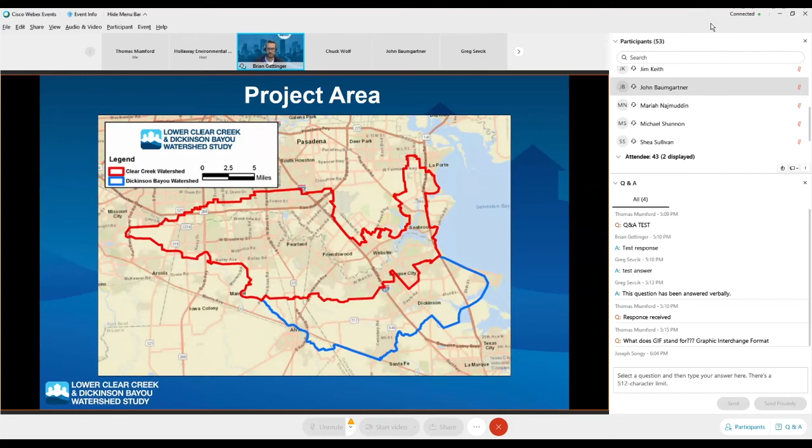So some more about the focus, just to set the table. I mentioned, and we're going to hear this a few times, this is a riverine study of regional magnitude. So depending on the kind of study you're doing, depending on the scale you're looking at, you use different modeling software. This project was based on modeling software that's focused on riverine analysis, that's looking at very large flows following a large channel.

And so we are predicting things that are going to have impacts on the channel. There may be impacts that are happening away from the channel that are affected by the channel but not directly associated with it. So when we talk about damages and flooding, you might say, hey, my house or business flooded during Harvey, and your map's not showing that. Why is that happening? That's because this is just a riverine analysis. And one of the next steps we'll talk about towards the end is potentially tying the localized storm drain capacity constraints into the analysis to fully predict what those things look like.

We are looking at a 24-hour duration storm event with an Atlas 14 intensity. So the Atlas 14 is something that came from NOAA. That is the most recent rainfall data that is different than what the floodplain maps are currently based on. Even the newly adopted floodplain maps are not based on that rainfall intensity. So we're using the newest and best available data.

The benefits that we're going to talk about tonight, as far as number of instances of flooding that are reduced and the damage reduced, are also going to be higher than what is presented in this study. So we have a table with the damages caused by the flooding and reduced, but because we're not tying in the local storm sewers, there's a very high likelihood that those damages are going to be prevented to an even greater extent because of those storm sewer impacts.

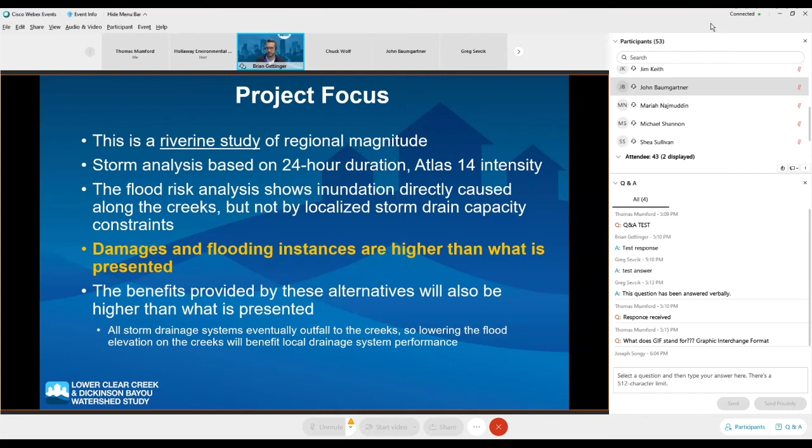So where are we? Again, we're in Dickinson Bayou. The analysis is focused on essentially a subset of the Dickinson Bayou watershed because we're looking at the riverine impacts, so the area in close proximity to the channel. We divided the watershed into 3 different reaches. The purpose of that was to support identifying and evaluating improvements in different sections of the watershed because the watershed is going to behave a little bit differently in different sections.

So when we talk about damages and instances of flooding and impacts, you'll see things presented in reaches, Reach 1, Reach 2, and Reach 3. So think about those happening from west to east as we go across tonight.

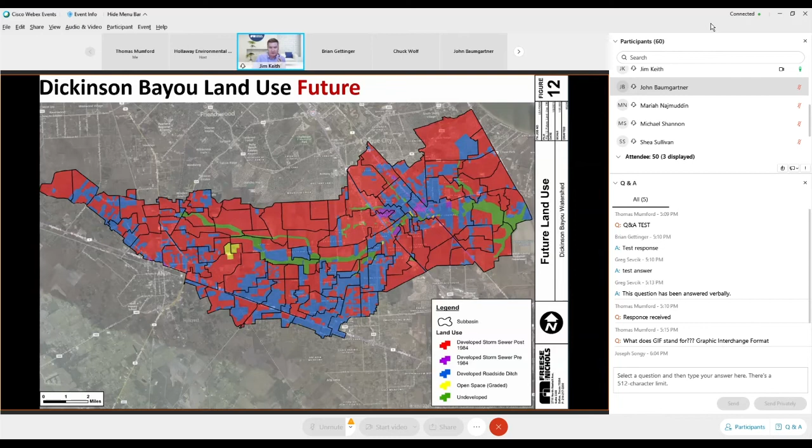The comparison here shows the FEMA effective discharges, as well as our new existing conditions, which is based on the Atlas 14 rainfall. So you see some increase already there in terms of what FEMA had previously modeled and our new model based on the rainfall data. And then the future discharges, which again do not assume detention, but you're looking at 6 to 7% increase in discharges between just existing and future conditions.

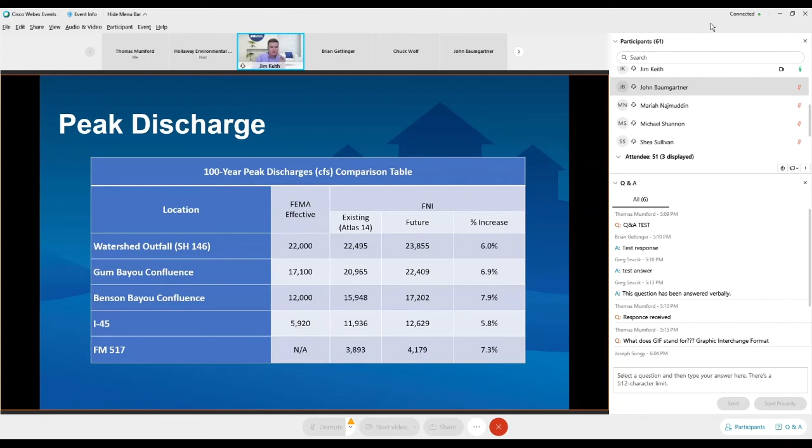So how do we convert that flood risk, those numbers, into damages, which really helps us understand the challenge that we have to solve here. And so what we did is bookend the problem between a 500-year storm, which we all know you guys have suffered major storm events in this region. And so we know we need some solutions to reduce flood risk during those types of events. And then we look down to a 5-year storm, which is a pretty frequent event. But you can see in the Dickinson Bayou watershed, there's still a significant number of structures. Over 1,300 structures are flooded in a 5-year storm.

And so this window here is what we're calling our area of benefit. Structures that are flooded in a 5-year or below storm events are really unlikely to benefit from any kind of structural improvements that we're proposing. They're too low in the floodplain to really see any kind of impact. And so those types of structures are typically good candidates for elevation or buyouts, what we call non-structural improvements. So we're focusing our area of benefit and our solutions on this zone of damages that can be mitigated between the 5-year and the 500-year storm. And you can see that's $765 million worth of damage and over 13,000 structures.

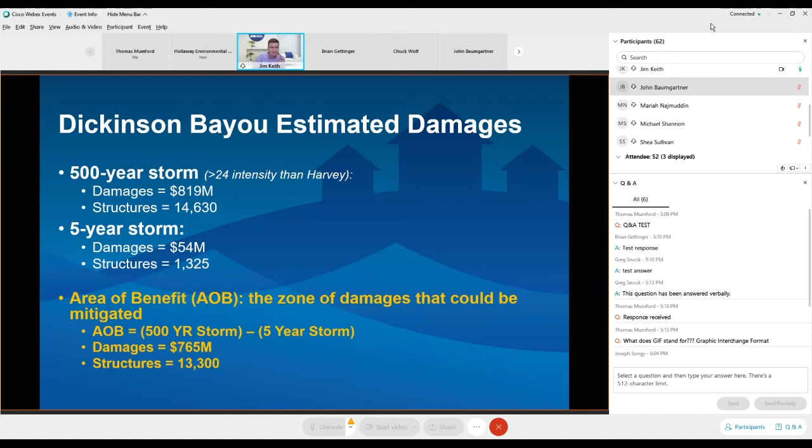You've seen the view of the flooding from above in some of the previous figures, looking down on the floodplain. This image is a little different. What we're looking at here is a profile of Dickinson Bayou, looking at it from the side. On the left, you'll see the green line is State Highway 146. And as you move to the right, we're working our way upstream. Just imagine you're going up the main channel of Dickinson Bayou, past I-45 up to Cemetery Road.

The red line is the 5-year flood elevation. The blue is the 100-year. And the purple line is the 500-year flood elevation. And all of these tiny X's that you see across here are structures based on the estimated finished floor elevation. So we found this graph to be really informative and a really good way for us to look at the flood risk through this watershed.

You can see that there are a significant number of structures, especially between State Highway 3 and I-45. There it is. There's the bowl. There's just a low, depressed area here. And so it helps us understand not only the extensive flooding, but really the depth of flooding that can impact these structures. And the damage estimates are really driven on that depth. The Corps of Engineers provided depth damage curves that we used. And so obviously as the depth of water in a structure increases, that damage increases greatly.

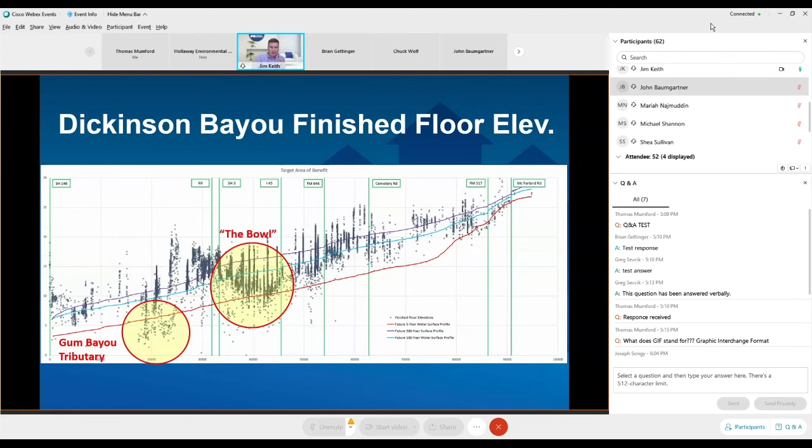So these two circles here show, again, in side profile view, the two areas we're really focused on reducing flood risk in this study. That's the bowl and then that Gum Bayou tributary.

So this became a really challenging area as we started to look at these mitigation solutions. Brian's going to talk about that in a little bit, but getting water out of this bowl is a major challenge.

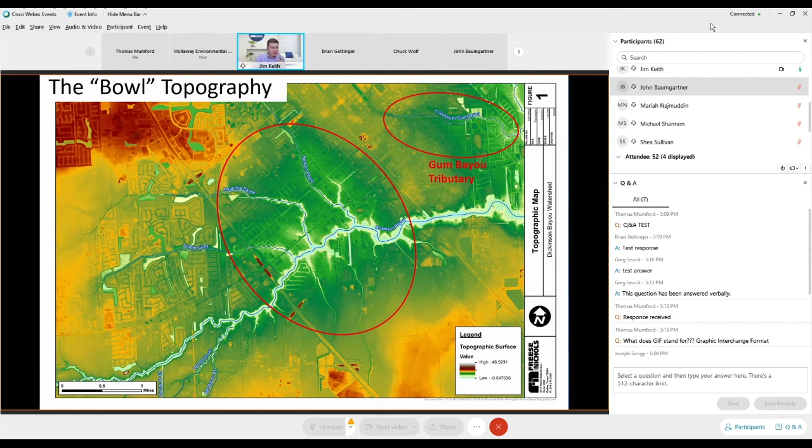So the results of the flood risk assessment, again, we broke the planning area into these three reaches. You see here DB1, DB2, DB3. And so we looked at the number of structures flooded on individual events, so just for the 500-year or the 100-year event. But what's really informative for us is to look at the instances of flooding over an entire 50-year period.

And so this is a statistical projection. If you look at over a 50-year period, you're going to get 2-year storms, 5-year storms, 10-year storms, you're going to get a 500-year storm. If you look at that 50-year window, you can see the instances of flooding stack up. And so the results show that we'll have over 43,000 instances of flooding over that 50-year period with a damage of $483 million. And really more than $483 million if you factor in all the reaches.

So the damages and flooding instances increase in the future. And part of that is due to sea level rise as well as future development. So another area that the Corps of Engineers helped us with is sea level rise projections. And those projections were incorporated into the downstream boundary conditions of the model.

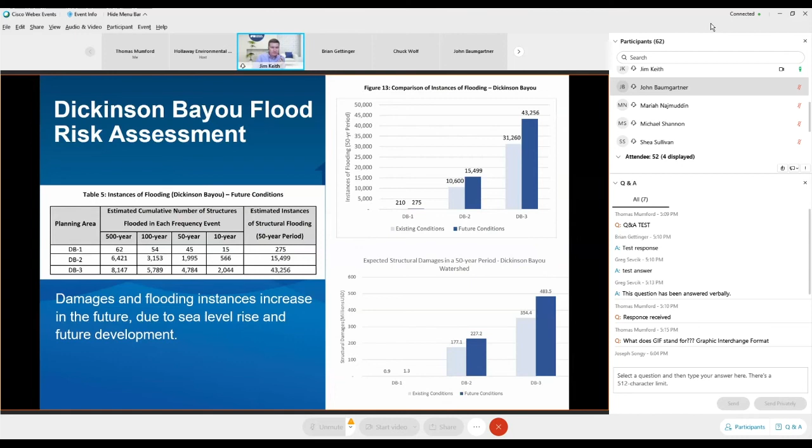So beyond just the number of structures and damages, we looked at transportation system impacts. Transportation obviously affects us during a storm event. It affects you getting around town, being able to pick up your kids, for emergency responders to get to people that need help. And so we used an established flood hazard calculation that's done by the U.S. Bureau of Reclamation that looks at the depth of flooding over roadways and then how fast that water is moving over the roadways to provide a hazard classification between a low danger zone, a judgment zone, and a high danger zone.

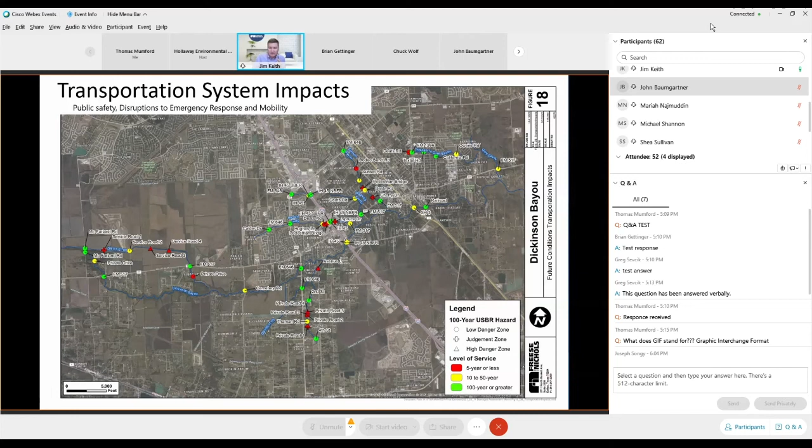And so these dots on the map, basically green circles are areas of lower flood risk, and red triangles are areas of the highest flood risk. I think the good news here is that most of those red triangles are small rural roads. But again, you can see some major thoroughfares are impacted in some of these events.

And then we also looked at critical infrastructure. So this is fire stations, medical facilities, hospitals, schools, and major water infrastructure, treatment plants, pumping plants. And this is also an important factor as we look at where we can reduce flood risk. We need to make sure that in major storm events, these critical infrastructure locations are able to function or protect people. So the blue area shown here is the 100-year storm event. And so you can see along FM 517, there's several schools that are at risk, as well as some water infrastructure and some hospitals there to the north.

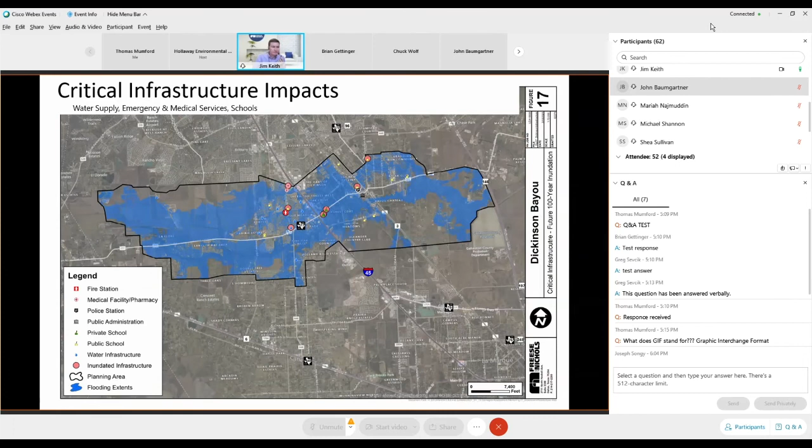So to summarize the flood risk segment here, the flood risk in Dickinson Bayou is significant, and particularly in Reach 3. You can see we have, in the 500-year event, well over 14,000 structures that can be flooded just in that single event. That's not even over the 50-year period. That's just in a single event. And $1.7 billion of flood damage for a 500-year event.

And so we used these damage estimates and looked at this curve to see, okay, where can we get our best bang for our buck? What kind of projects can we implement that can reduce not only the large 100-year and 500-year events, but this 10-year event as well, where we still see significant flooding in the watershed. So with that, I'm going to hand it back to Brian to start walking through the mitigation alternatives.

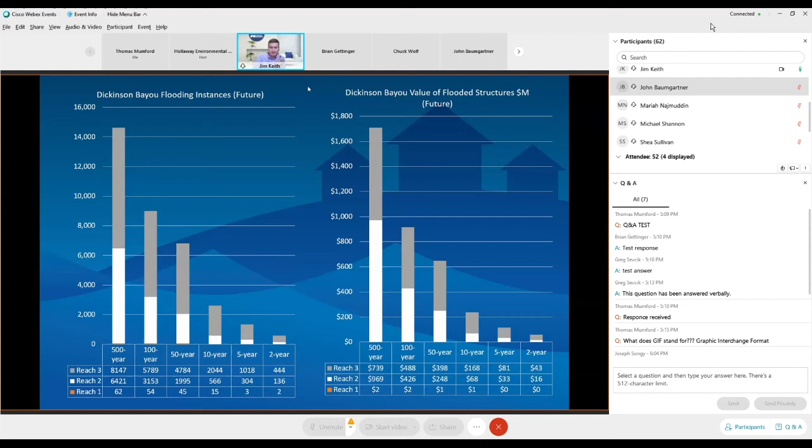Thanks, Jim. Appreciate you walking us through that. Before we jump off the slide, one thing that attendees might find interesting is, where are the orange bars, right? I see Reach 1 with an orange dot. Why is nothing happening in Reach 1? At this point in Reach 1, there are very few structures to flood. It's not that flooding is not happening in Reach 1, it's just not flooding very many structures.

So it is important that as new structures are built in Reach 1, that they are built at an elevation that they will not flood, right? Setting those elevations based on known flood maps is really important, and making sure that their neighborhoods or structures don't flood is critical, because right now, the only reason things aren't flooding in Reach 1 is because nothing's built there yet. Otherwise, it would look similar to the other two reaches.

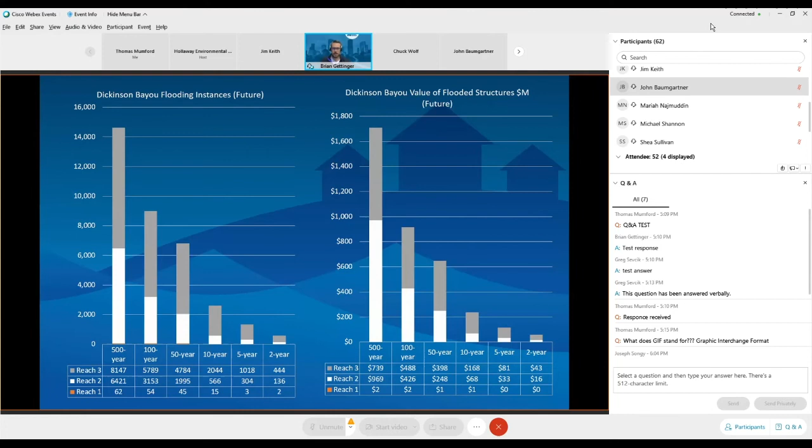All right. So we've established the flood risk, which is significant. So let's talk now about how do we mitigate it? What are the mitigation alternatives? So before we jump into those alternatives, we need to talk about how we're going to evaluate them. So we have 4 different quantitative metrics, and Jim walked through these on the damage basis, but we're going to now evaluate these on how much they benefit those damages.

So instances of flooding, how many times a structure is inundated during the 50-year project horizon period, which is a statistical analysis that accommodates the 2, 5, 10, 50, 100, and 500-year storm events, and looks at how likely they are to occur in a 50-year period. Structural damage, same thing. It looks at the value of the structure, uses an Army Corps guideline for depth of flooding to determine how much damage that structure incurs in that event.

Then we'll talk about capital cost. How much is this going to cost to build? And then transportation system impacts. How much better does the transportation system function with the improvements over the existing conditions?

And another thing to note, we talk about instances of flooding. I mentioned that this is all structures that exist today, right? Not future structures. Same with structural damage. We're looking at current property values, current structure values on those sites, as well as current elevation. So if structures in the future were raised, that would obviously take them out of the floodplain as well.

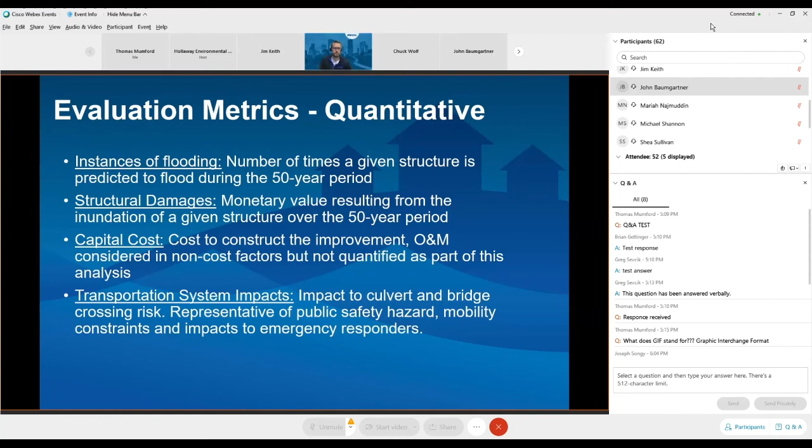All right, on a qualitative basis, we worked with the stakeholder groups to establish what we're calling non-cost factors. Everyone, I think, can appreciate that just the cost of a project and how many structures it benefits or doesn't benefit is not the only metric. Obviously, how it looks and feels, how much it disrupts the community is all very important information. How resilient is it? Is it going to work for 50 years without a lot of maintenance?

How many people do we have to get on board to do this? Is it kind of how we comply with other agency coordination? And how fast can we implement this? Is this a 10 or 15 or 20-year permitting project, or something we could start today? That also kind of ties into how expensive is it? Is it something we can finance quickly, or have to spend a lot of money over time to build?

So we looked at those factors. We weighted them with the stakeholder groups. They all weighed out similarly. The kind of four leading categories there, and then other agency coordination comes in at 10%. So all of the criteria were applied to all the different projects, and that's what we'll be presenting today. And when we produce the written report, we'll have a lot more detail backing up how each of those scored.

We also established a couple different constraints in order to help put boundary conditions on the analysis. For Dickinson Bayou, there were 2 constraints. The first constraint is that we are not going to cross I-45 with any sort of open cut solution. That would look like some sort of channel or a major culvert. We're not going to cross I-45. That is a major disruptor for the community.

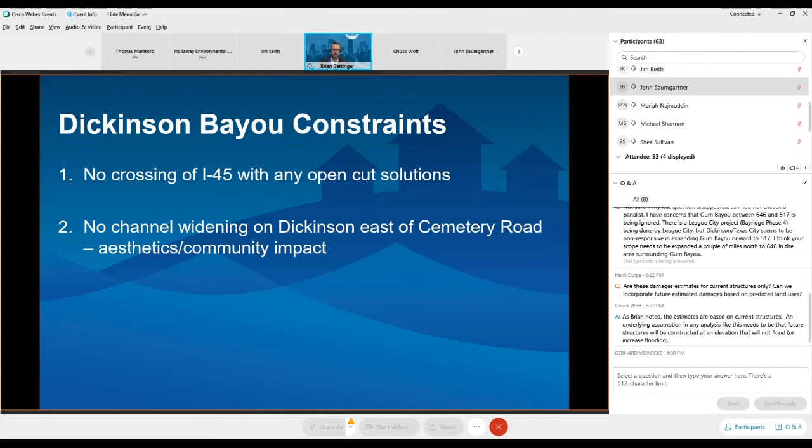Having been on Dickinson Bayou in a boat, it is a fantastic waterway. It has a lot of aesthetic benefits, a lot of community benefits. With a widening project there, there are also a lot of homes that back up to the bayou. We did not want to disrupt that as part of this analysis, so we're looking for solutions that did not widen or modify the bayou east of Cemetery Road. So with those constraints in mind, this is a list of all the different individual concepts that we evaluated.

So a lot of different detention alternatives, some bypass alternatives. We looked at clearing and desnagging of the channel, which is essentially removing vegetation along the channel banks. We suggest, in some cases, property buyout or elevation for properties that, as Jim mentioned, are so far in the floodplain that they cannot be realistically improved by other structural measures. And then we will spend a couple minutes talking about a flood wall, which is an interesting concept.

No bridge modifications were deemed to be a problem. We looked at all the bridges, and we looked at how they reacted during different flow events, and none of the bridges had major impacts for passing water based on current conditions. So that's a good thing.

And we did not have a tunnel alternative for Dickinson Bayou. Dickinson, because of its current state of development, is a good candidate for detention, particularly west of I-45, and in some cases a good candidate for a bypass because of the lower density development. Tunnels are generally useful more so when we have high density development. So tunnels were not going to be cost effective in this measure. We could move and store water more effectively in other metrics.

So those are different individual concepts we evaluated. We're not going to walk through each one of those and their benefits tonight in this meeting. We will walk through each of those in detail in the report that will be published. But tonight we want to focus on how these concepts play together to create a combination solution that has the most value.

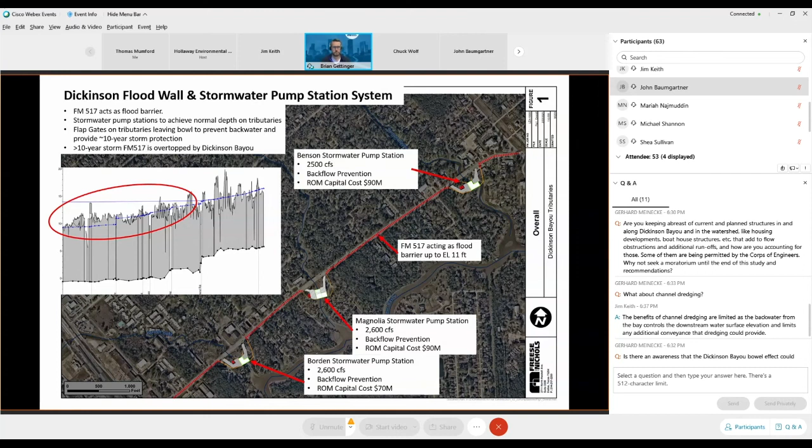How many flooding instances are reduced per dollar? Do these things cause downstream impacts that have to be mitigated? How many $1 million of flood damage reduction happens? And what's the capital cost, right? And then we have those non-cost factors. So detention ponds, particularly on open land or land that potentially could be purchased for sale, score pretty well.

Solutions that require a lot of land acquisition, like the bypass channels, score poor because of that. Now, this is only a 100-year event analysis. So if you're looking at a benefit cost analysis, you're looking at the whole suite of storms for the 50 years. So when we see this flood damage capital cost of 0.5, that's not a 0.5 BCA necessarily. That's just how it performed in the 100-year event.

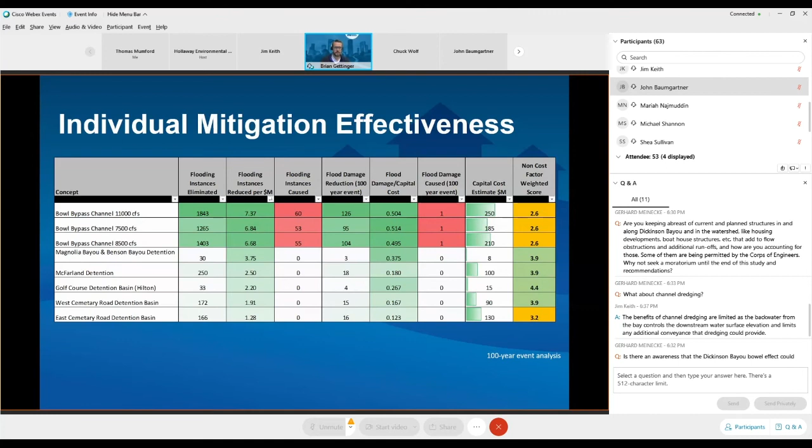So what we have now is kind of multiple different options, right? A suite of solutions. The question is, how do we utilize that suite of solutions in combination to benefit the area to the maximum level? So some conclusions that we came up with in the analysis.

Individual detention improvements provide localized benefits, which is good, but as we found out during Hurricane Harvey, detention ponds have a limited value when you get into a multi-day storm event because they fill up, they take a long time to drain. I know the detention pond near my house filled up, and it takes about a week to drain usually, right? So if we have a storm event that happens back to back or even over a couple days, that detention pond can't handle a multi-day storm event. So detention is good, but not as good as conveyance.

Although the water surface is reduced by multiple feet with the bypass channels, even with that large diversion, we're getting flooding still happening in the bowl, right? That's when we talked about the flood wall. The other thing that's important, because Dickinson has available land, we've got that regional detention opportunity on Dickinson Bayou that we don't have in our own study area, talking about Clear Creek, that doesn't exist anymore. So we need to identify areas for regional detention and plan those and get those lands set aside and built before development occurs.

The bowl is likely to need extensive elevation of structures, buyouts, or a flood wall, or some sort of stormwater pump station system. That area is extremely challenged. There were a lot of structures that were built very low in that area that today we would not build there, and we have to find a way to protect them or move them or raise them up.

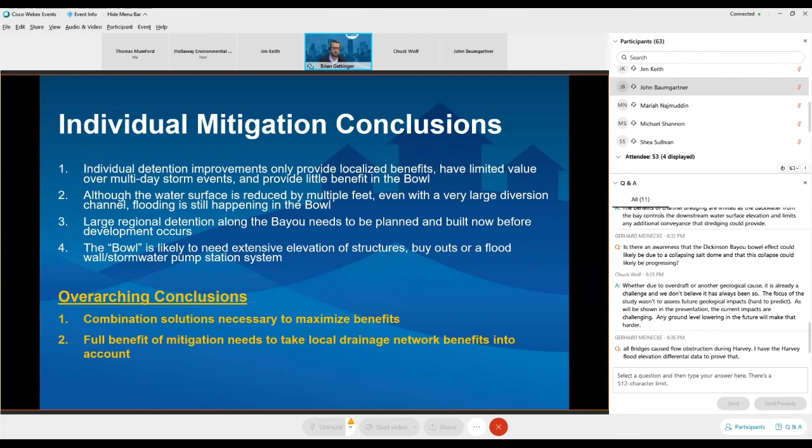All right, so let's talk now about some of those combination mitigation measures. So for Dickinson, we looked at 2 different scenarios. One of those scenarios focused entirely on detention. Can we build detention west of I-45 at a level that will allow us to prevent damages to the bowl and other areas?

The second scenario said, okay, we're going to build all that detention that we talked about, but we're also going to build a very large diversion channel that's targeted at the bowl and to move flow further down into Dickinson Bay. So the 11,000 CFS diversion channel represents greater than a 50% diversion of flow from that area where those 3 bayous come together. So a very large diversion channel to try to pull that water surface elevation down and provide benefits.

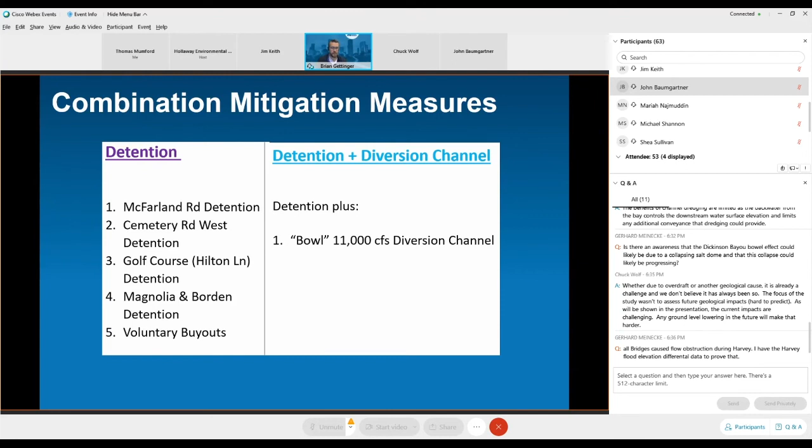So what you're going to see in the next slide is a colored raster plot, which is a comparison between the condition without the improvements and the condition after the improvements. So this is the detention scenario. So we have 4 different detention areas, actually 5. Number 4 has 2 areas, and that's paired with buyouts. The buyout cost is not included, and structures are not identified specifically, but areas that could not be benefited would be something we talk about for buyouts.

So let's talk about each one of these individually. We'll start at the west and work our way to the east. The first basin, we named it the McFarland Road Detention Basin. It is north of FM 517. It's in the proximity of some new developments that are happening in that area, but not in an area that would overlap with the development. So it's been sited on kind of unused or unspoken-for land in that area.

If folks are familiar, there's a bypass channel that comes off of Dickinson north of FM 517. It's actually located where that bypass channel exits and then crosses FM 517. The second basin we're calling Cemetery Road West. It's at that confluence where the bypass channel comes back into the main channel.

These 2 basins are large, much larger than the basins as we get further to the east. That's in part because there's more available land, and detention is most effective when it's provided in the upper part of the watershed. So 90% of the total storage is provided in these 2 basins.

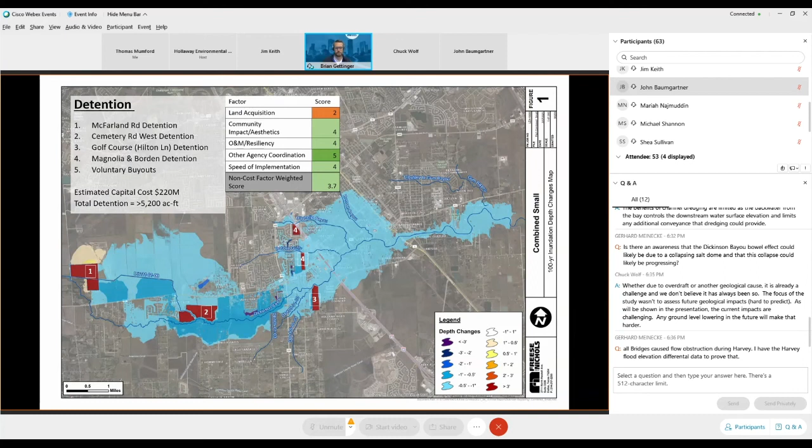So one of the important things on flood control is how do we sequence it. The detention scenario is good because it doesn't require us to have dependencies. Each of these projects is self-mitigating. There's no downstream impacts from any of these properties. So they could be implemented in any order that is feasible. Whatever project has land most available and is easiest to start could start independently of one another.

All right, so where does the rubber meet the road? How do these perform quantitatively? We talked about the flooding instances by event, right? So in a 500-year storm, we had 14,600 instances happening. Well, what happens now that we have the detention ponds? The red bars are future conditions, no mitigation, and the purple lines are future conditions with the detention mitigation.

So we see in a 100-year event that there are 500 fewer instances. That means 500 fewer structures are flooding with the detention ponds. We see a reduction in damage of $36 million in a 100-year storm. We also see a reduction of water surface at I-45 of 0.37 feet. So over the 50-year design period, looking at all these storms, we see almost 2,500 instances of flooding prevented and $41 million in damages.

So looking at some different efficiency numbers: every $1 million of investment would prevent 11.3 instances of flooding, which if you flip that around, for every instance of flooding, you spend $90,000. So that's how the detention concept measures up on quantitative metrics.

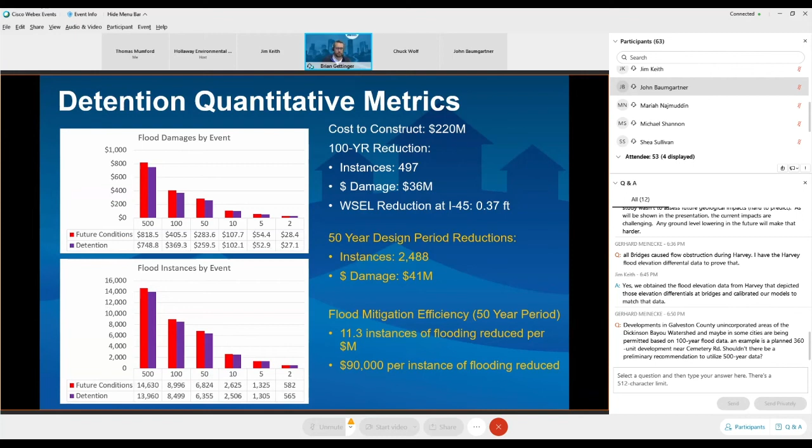As I said before, open land is available now, so let's set that aside and make it for regional detention. Storage alone, unfortunately, doesn't impact the bowl, right? If we jump back to that, we're having very little impact on some of these 10-year events. That means we're not impacting the bowl. A lot of that stuff's happening east of I-45. And significant residual risk is existing even with those improvements.

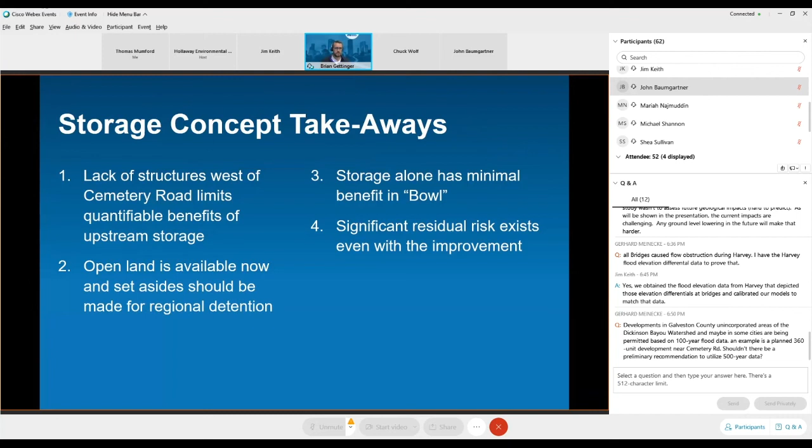So we got 5,200 acre-feet of storage, which is a substantial amount of storage over those different basins, 5.5 Astrodomes. And we are having improvements, but as a team, we looked at it and said, hey, that's not good enough. So what else can we do? So the next step was to look at the second scenario, which is let's build all the detention and let's build a conveyance system. So this is what we're calling detention plus channel.

So it has all the detention we just mentioned, as well as a diversion channel that begins kind of right at the nucleus of that problem area, right where Borden Gully and Magnolia Bayou and Benson Bayou come in, Dickinson Bayou, and it conveys that flow to the east across Highway 3 and the Union Pacific Railroad track, and then follows an existing channel out into Dickinson Bay.

So what does that look like? Well, you can see the color scheme change quite a bit. Instead of having wide areas of very light blue, we have a huge area of a 2 or 3 foot reduction in water surface elevation in the maximum impact area. We also have benefit propagating west of I-45, where we have 1 to 2 feet of benefit all the way back past Cemetery Road. So a dramatic increase in benefits.

We do have an increase in cost, right? This channel does have to be constructed. It is approximately 300 feet wide, so this is a very large channel. We are not proposing building the Los Angeles River through here, the large concrete structure. This is something that could certainly have an amenity benefit for the area, but it is a very large channel. So football field, 300 feet wide. So this is a wide flood control conduit.

At 11,000 CFS, again, we're talking about Astrodomes. At 11,000 CFS, that would fill up the Astrodome in 1 hour. So we talked about the detention, right? 5,200 acre-feet of detention. But at 11,000 CFS, that fills up in 5 hours. So this 11,000 CFS conveyance improvement allows us to move water out of the system perpetually, no matter if the storm lasts an hour, 24 hours, or 72 hours.

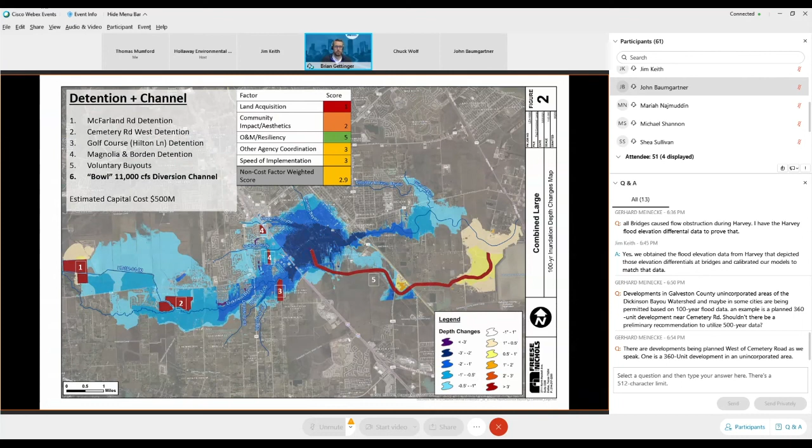We are really kind of recreating this eastern section that was initially proposed at least in the 90s, if not earlier. So it's been talked about a long time, and we're hoping that we are at a point here where we can help make it come to fruition.

So how do you sequence this? Just like the detention ponds, each of these are self-mitigating, with the caveat on the diversion channel that there's going to have to be some downstream impact mitigation as part of that project. But the detention ponds can still proceed, and the bowl diversion channel can proceed by itself.

So let's see how this stacks up quantitatively. So we had the construction cost increase from $220 million to an estimated $500 million to construct. But all of a sudden, our damages that we prevent go up substantially. So now we're looking at over 2,000 instances of flooding eliminated in the 100-year storm, $146 million. We're talking about almost a 2.3 foot drop in water surface at I-45, which is a huge number.

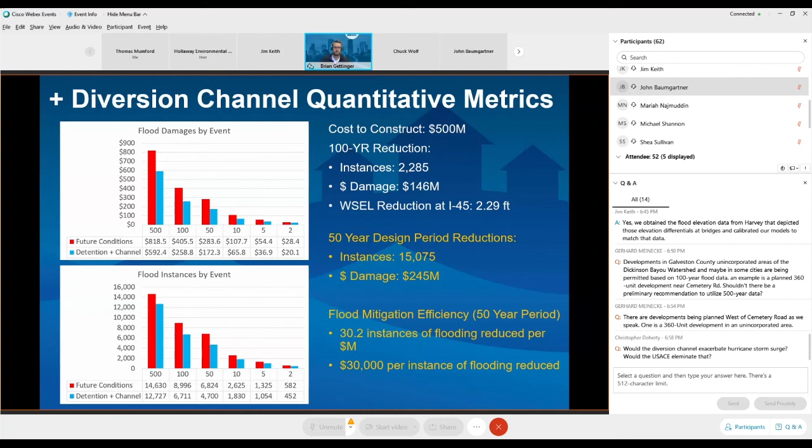So just to call attention to this, I mentioned it earlier, but there are 60 to 70 structures that are impacted based on the conceptual layout of this. That's something that will have to be refined and improved as that concept goes forward.

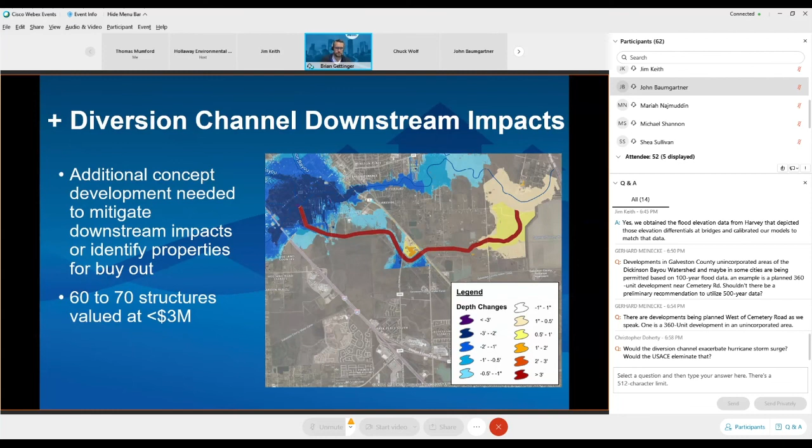All right, so some takeaways on this concept. A huge number of structures are removed from the flooding risk. So we've got 15,000 structures over a 50-year period. We've got to mitigate those downstream impacts. Even though we have a 2 foot or more reduction in the bowl, there are still a lot of structures flooding. Even with that reduction, there's still 1,800 structures in a 10-year event that are flooding.

This goes into Jim's comment earlier that there are some structures that just cannot be helped, even with massive bypass channels. That bypass channel is taking out more than half of the flow out of Dickinson Bayou, and there's still structures flooding in the bowl. That's a sign that we have to do something else in that area. And then, $30,000 per instance is the best of any of our combination analysis we did as part of the study. So it's getting to a point where it does provide quite a bit of value for the improvement.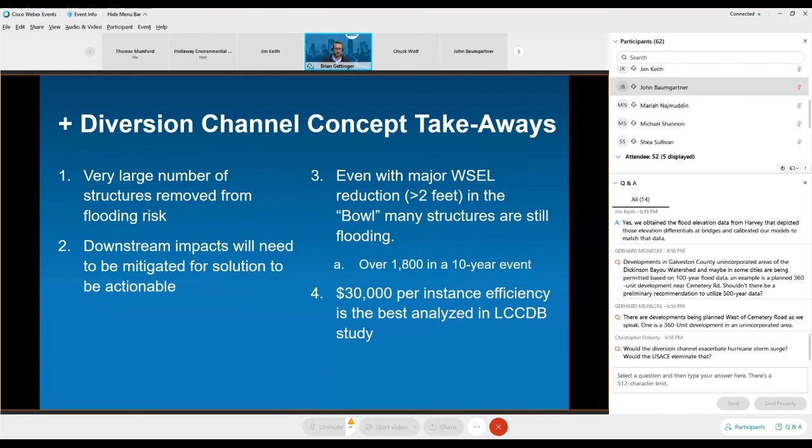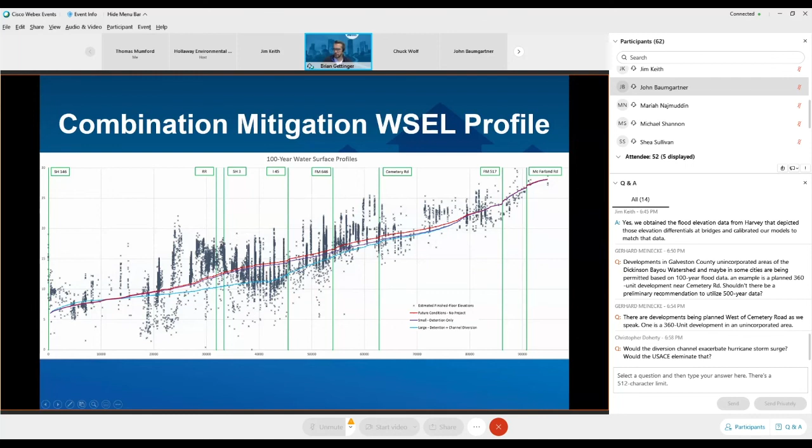But we got a foot or so reduction. It starts to dissipate as you get towards I-45. But substantial water surface elevation reduction. 5,000 acre feet is a lot of water retained. But not nearly the impact you see from the blue line, which is, zooming in here a little bit more, the bypass channel intake is right there where that inflection point is. Major reduction compared to the detention only, and really targeted at the area of maximum damage.

It also would allow this Gum Bayou area that has a problem to convey flow to Dickinson Bayou and still be below the existing conditions. So it allows other drainage to happen to Dickinson Bayou that right now can't get there.

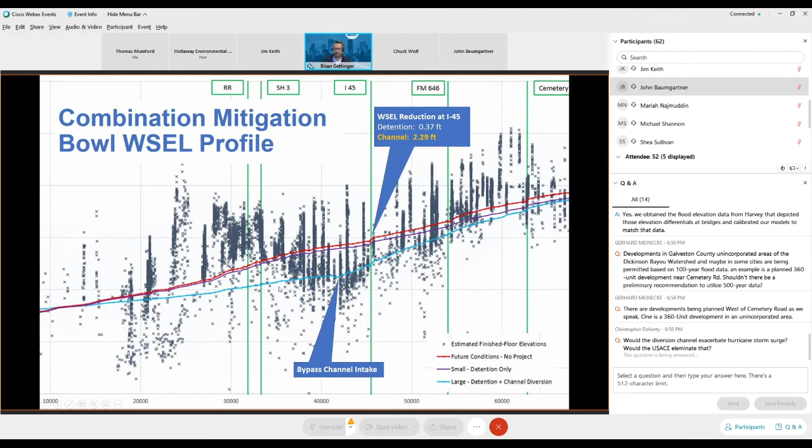Dickinson is built in a low-lying area. We have impacts from storm surge. We have impacts from Galveston Bay being at a higher elevation. And so some of this flooding is unfortunately not mitigatable, no matter how much conveyance improvements you provide. But we can substantially make it a lot better.

Another area to focus in on is, again, the 5, 10, and 2-year storm events. We've got to find a way to mitigate those. And even with our massive channel and detention project, we still have a lot of flooding happening. 1,800 structures and over $65 million in damage happening in the 10-year event.

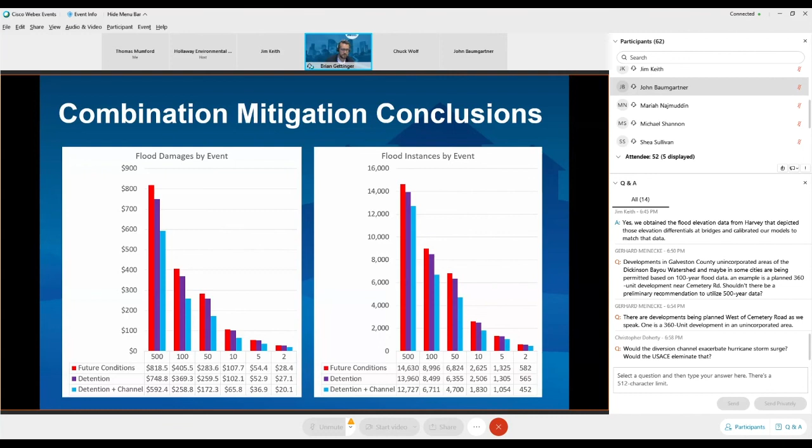So the Bowl is improved, but it's still a problem area. We had almost 3 feet of water reduction, but there's still more improvement that has to happen there. So that's looking at buyouts, property elevation, and potentially if the Texas Coastal Study happens and we get a storm gate on Dickinson Bayou, then there's an opportunity to try to look at a flood barrier with FM 517 as well.

These benefits don't fully account for drainage impacts. That's something that can be tied in later to fully build up the benefit ratio as part of a benefit cost ratio analysis. The 50-year project window is important, right? That's how you calculate a benefit cost ratio, but it penalizes the impacts from those major storm events, right?

A 500-year storm is not very likely to occur in a 50-year project window. Same as a 100-year storm, not very likely to occur. A 50-year storm is going to occur once statistically, right? So smaller events happen more often. Those are prioritized as part of the benefit cost situation, but our analysis is focused on 2 things. One, maximum benefits, and also how do we mitigate major storm events, right? So the 50-year window is a statistic, but it's not the whole story.

Significant residual risk does exist east of I-45 due to those low-lying structures, and you begin fighting sea level, right, and storm surge. When the downstream elevation is high, there's sometimes very little you can do. It costs a whole bunch more money to move a little bit more water.

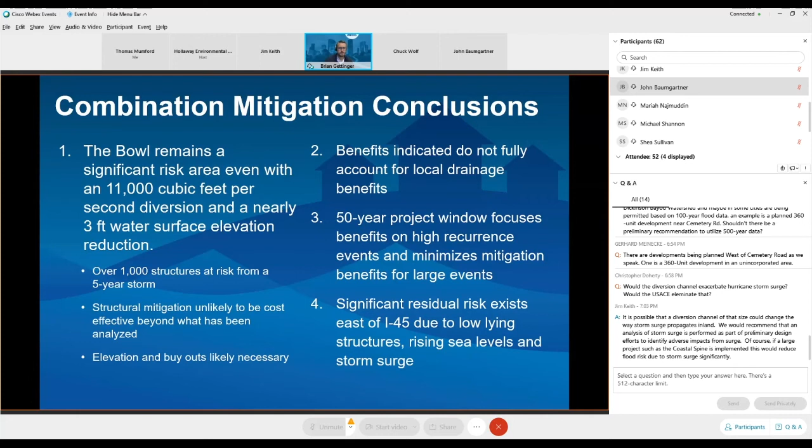The diversion channel is the most cost-effective solution that we analyzed. Storage alone is effective, but not nearly as effective as when it's paired with a conveyance improvement. And that conveyance improvement is not duration dependent. So, for example, Harvey lasted multiple days. Conveyance improvements will keep moving water every day, all day, and never get full. So that's a significant benefit.

We were not trying to target benefits for 2- and 5-year storms. It may be an opportunity that local City of Dickinson or City of League City studies can provide some more benefits on those smaller events. We were really focused on mitigating the 100- and 500-year storms as part of this analysis, and that's why we sized the infrastructure on the large side to pick those up.

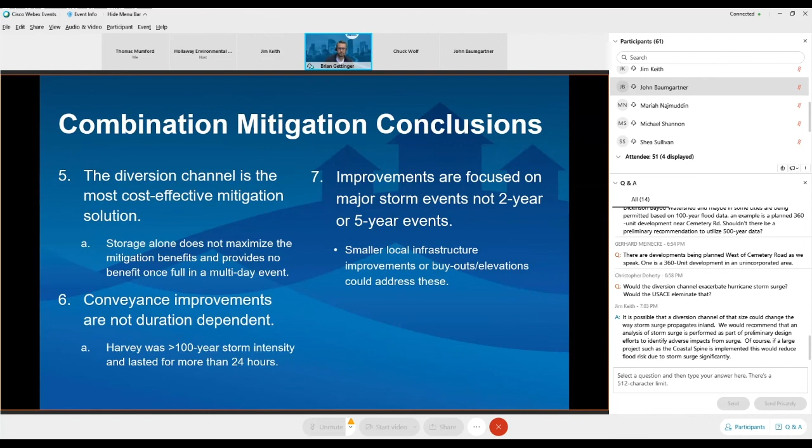All right, so we talked about the what, right? The what is we need detention and conveyance for Dickinson. The next step is how. How do you do that? And the biggest question mark on the how is how do you pay for it? $220 million or $500 million is a lot of money. And so how do we establish financial partnerships with local, state, and federal entities to get those funds?

There's a lot of different partnerships available. There is very rarely free money, like the saying that there's no free lunch. Most of these programs require some sort of local match that can be a pretty significant percentage. And even if it's not a significant percentage, if the total cost is significant, say $500 million, even 20% of that is a significant sum.

Also, many of these programs are going to have strings attached, sometimes contracting rules, financial reporting. Sometimes the projects have to meet key metrics. As these programs are pursued, it's something that we need to be careful of, that we understand the implications of these program requirements and make sure that it's a worthwhile partnership, both for the sponsor entity and the receiving entity.

One example, there have been some newer programs developed since Hurricane Harvey that have put a significant emphasis on low to moderate income areas and socially vulnerable areas. So the Bowl and Tributary Dickinson Bayou are both areas that could potentially qualify for LMI, which is low to moderate income, or SVI, which is social vulnerability index areas, and look at specialized funding for that.

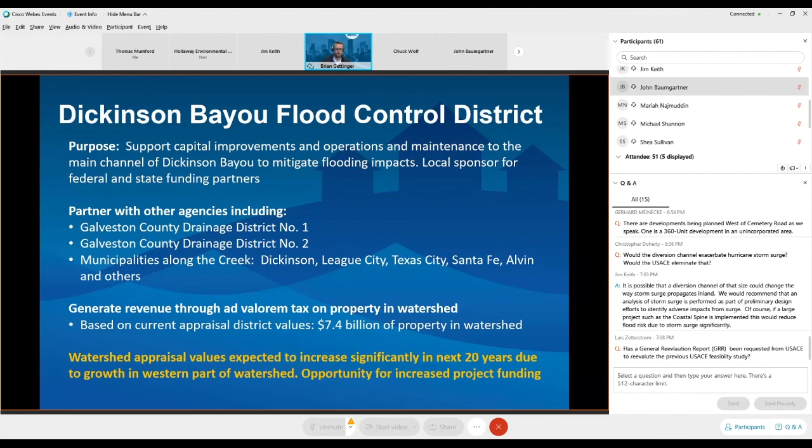An example that's been in the news just the last few days is the Gulf Coast Protection District. So this is a special purpose district that's being proposed in legislative session to fund the Texas Coastal Surge Protection System. So its charter would set it up to fund Brazoria, Chambers, Galveston, Harris, Jefferson, and Orange County improvements, and would tax those entities accordingly.

It would be appointed by the governor, and it would not only provide the local match for a federal project, but also be in charge of the annual maintenance on the project. So as an example, it's been set up before. Gulf Coast Protection District is something that could be a model for something smaller scale for Dickinson Bayou.